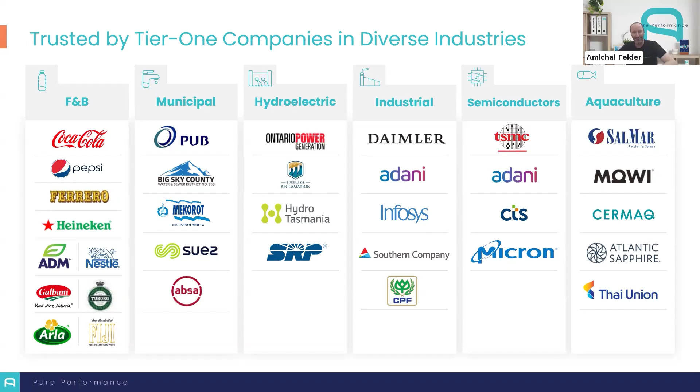Hello, so I'm Assaf, Atlantium senior scientist. Let's start with some definitions. So AIS is Aquatic Invasive Species, which means that it includes both freshwater and seawater organisms.

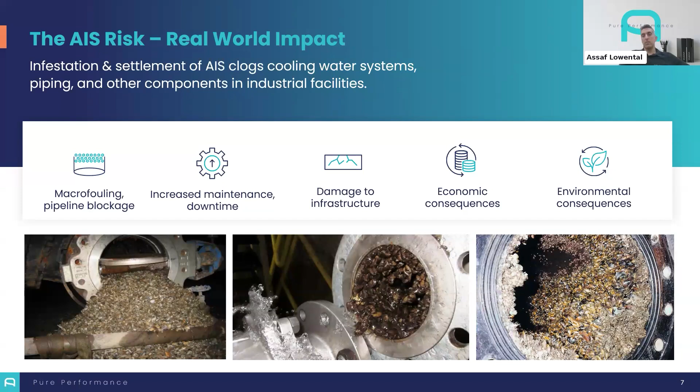Now during the last decade, this topic is already under regulation, and Atlantium is proud to be one of the solutions, perhaps the most sustainable one for treating ballast water. But this is not the topic of our webinar.

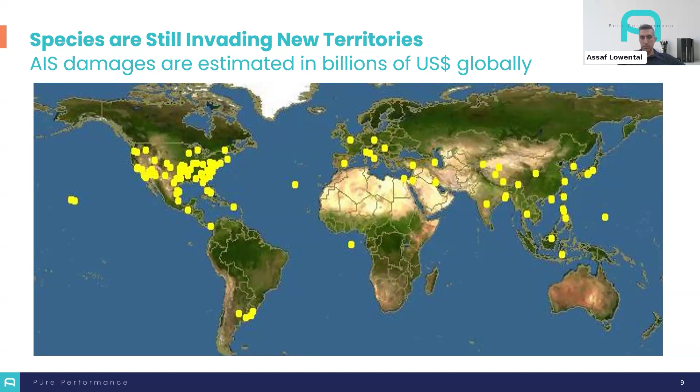So the bottom line, what I'm trying to say here, is that we have at least two cases where even after the ballast water management regulation is already effective, we still see new invasions. So it's only a growing problem.

For example, coral disease, which is what I was studying during my second degree. Also, they can cause operational problems such as biofilms. But again, this is not macrofouling, it's not clogging your equipment.

Next, slightly larger microbes such as diatoms and algae, they can clog your equipment, but this is not the topic of our webinar. UV can be used to treat those, but again, that's another story.

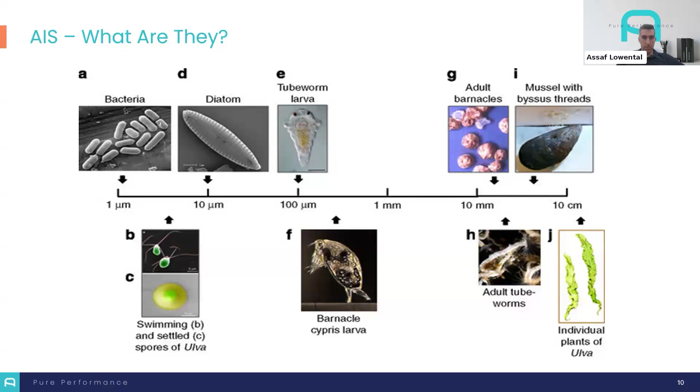So here I was talking about many invasive species which are not part of the macrofouling, but that's a list of many species that are macrofoulers. Some freshwater and some saltwater, seawater.

Now, what they all have in common is the critical feature that they all have a free-floating life stage. This free-floating life stage is also called planktonic, like plankton, or larval stage. Larva is like the baby. And so they can go through most of the filters and settle down on your equipment. Other than this planktonic life stage, another thing they have in common is that they usually require a very specific temperature for proliferation and high calcium for the shells.

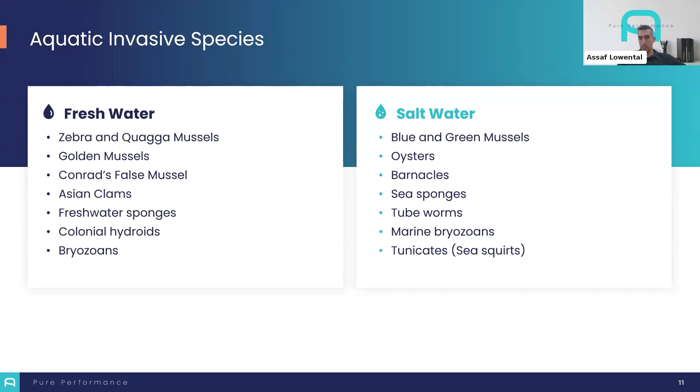Now, in freshwater organisms, the calcium that is needed for the shells could be a limiting parameter in some environments, but in seawater, there's plenty of calcium, but carbonate could be a limiting factor.

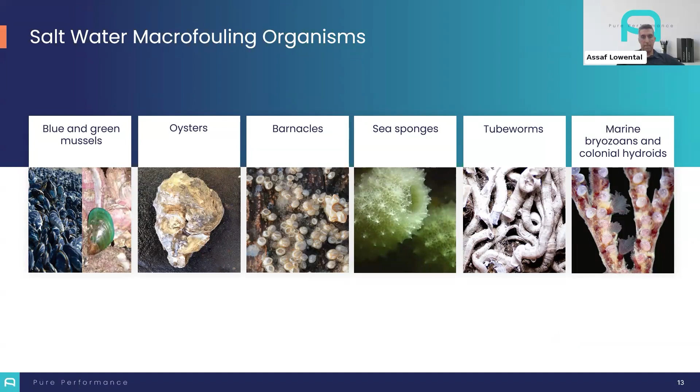All right, next. Now we're going to talk about the traditional treatment methods, starting with mechanical filters. Filtration would be the first guess for someone who just looked at the photos, right? They are pretty big organisms.

However, while filters will effectively block adult mussels, the larva, like the 100-micron ones, can easily penetrate standard filtration systems and subsequently settle on internal equipment surfaces, initiating new fouling. In some cases, another problem of filtration is that there are regulatory constraints limiting the ability to use large amounts of water for backwash and maintenance.

Going to chemical treatment, yes, indeed, it is effective against bacteria and many microorganisms. However, they do not provide comprehensive control for all aquatic invasive species.

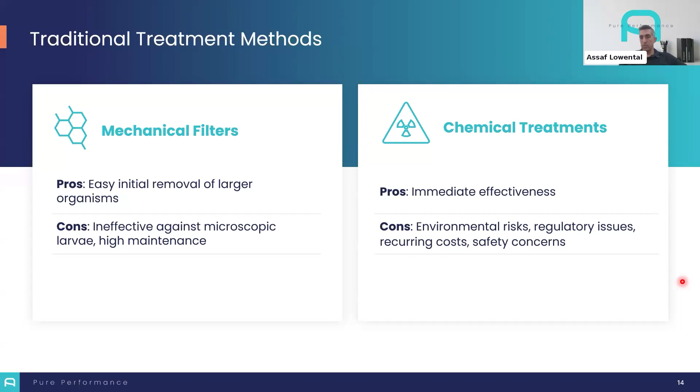Beyond operational factors like chemical handling, storage, potential corrosion, the primary concern with chemicals is their environmental discharge. Stringent permits often prohibit and severely restrict the releasing of biocides to the environment. Basically, this area of why we are not going to discharge biocides to the environment is called ecotoxicity, which is the risk of chemicals harming the local aquatic species and ecosystem.

The UV can treat only the planktonic phases. The cycle will, let's begin with the adult. The adult is releasing microscopic larvae. In this case of barnacles, it's called nauplii. It releases the nauplii into the water, initiating the planktonic phase.

The early larval stage is about 100 micron and can penetrate the filters, as we just discussed. After several molts, the larva can reach the size of about 500 microns with the sole purpose in life of attaching to the surface and metamorphosing into a juvenile, which is the sessile form already.

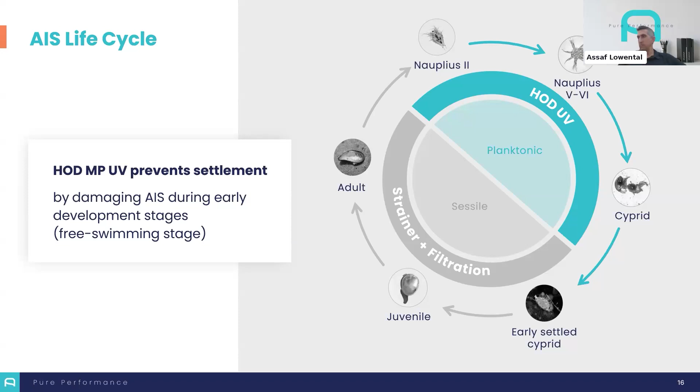Okay, now this is my last slide. In many cases, when we are asked to treat macrofouling, the problem the client is experiencing is with an animal we already have some experience with, especially if it's mussels. But in some cases, there are macrofoulers that we never treated before, that we don't have experience with. But we have the basic science saying that there are two rules of thumb to predict the likelihood of success. One is transparency of the larva, and the second is the life cycle complexity.

So I will explain. Transparency. If the organism's early life stages are transparent, our UV disinfection treatment is very likely to be successful, but not only is it going to be successful, it's probably going to require a pretty low UV dose for effective inactivation.

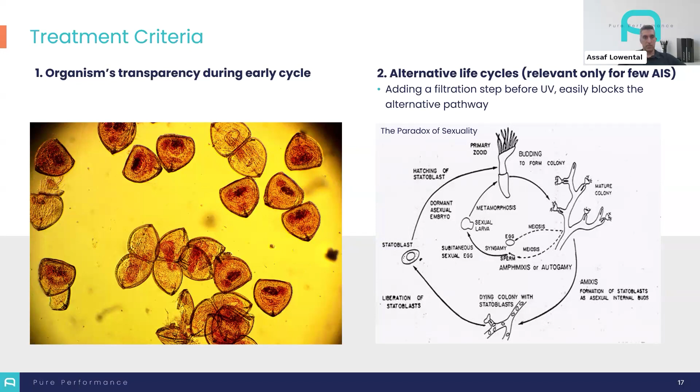Thank you, Assaf, for presenting the features of this important problem. Now I will briefly discuss Atlantium's solution, and we will see some examples of installations.

So first of all, when can we expect clients to approach us? There are a number of factors. Usually, it's after they have tried using chemicals, but it simply didn't work, and they're still suffering from AIS-related issues even after massive chemical injection. Sometimes, of course, chemicals can also cause secondary problems.

Needless to say, the chemicals that can kill the mussels will also damage other marine species. Another factor why clients approach us is environmental regulations, either self-imposed by the company or externally, and these regulations require the plant to stop dumping polluted water back into the environment. In both cases, the customer needs to find a chemical-free solution to its AIS problem.

Either way, Atlantium's approach, as Asaf mentioned before, is combining filtration, usually in the ranges of 300 to 600 microns, with the HOD UV. So in simple words, we say filter the large mussels and kill the larvae. The large mussels have little concern with regards to clogging of downstream equipment, as at this life stage the mussels lack the mobility and adherence capabilities. However, those large mussels can shade the larva while going through the UV, thus reducing the UV effectiveness.

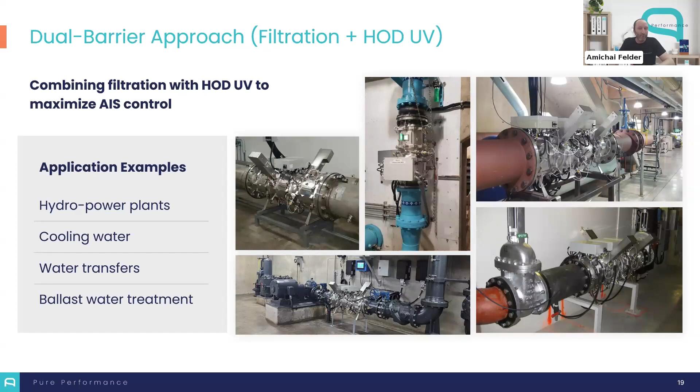And this is why we've adopted the dual barrier approach.

So most of the installations we have to date, I think more than 50%, are for hydropower plants, and usually the purpose is to protect the heat exchangers in the turbine bearings.

So this is a typical hydro plant, of course, and in this hydro plant there's a relatively small stream. I say small because it's all relative to the main flow in the penstock that is rotating the turbine. So usually you will find an 8 or 10 or 12-inch line that is going for cooling purposes of different equipment.

And the AIS-related issues that we see in these cases are either direct mussel settlements in condensers or heat exchangers that dramatically reduce the heat transfer coefficient, or we will see clogging of the filters that protect these heat exchangers, thus reducing the water flow.

And sometimes we're seeing both, meaning we will see settlements on the heat exchangers reducing the heat transfer coefficient, and at that point in time, when the plant requires more water for cooling, the clogging of the filters will not allow it, and instead of increasing the flow, you will have a decrease in the flow because of the clogging.

Let's look at some of our installations. First, I would like to describe the bio boxes. I'll take a step back here and describe these.

So when we're doing standard disinfection using our HOD UV, it's very easy to show the performance of the UV by taking microbial samples at the inlet and the outlet of the UV. And this is not the case when we want to show the performance of downstream equipment.

So sometimes in order to demonstrate the effect of the HOD UV, we're using a special box, actually two boxes, connected to the inlet and outlet of the UV, so that each box is getting a continuous flow of water and is continuously overflowing to the drain. So the BioBox is a simple way, I would say, to demonstrate and verify the performance of the HOD system.

Inside each box, there are plates made from different materials in order to mimic the downstream conditions in the strainer or in the heat exchangers. Sometimes it's metal and sometimes it's plastic.

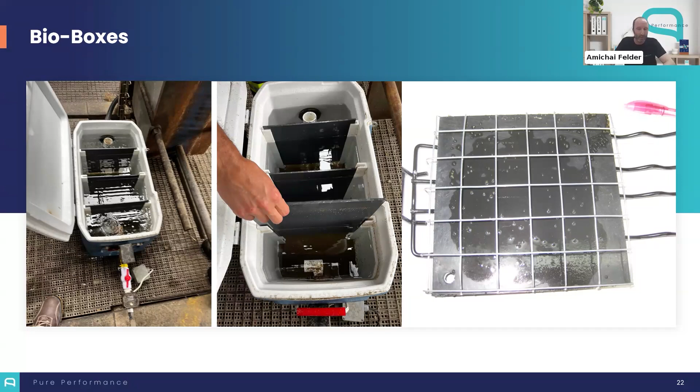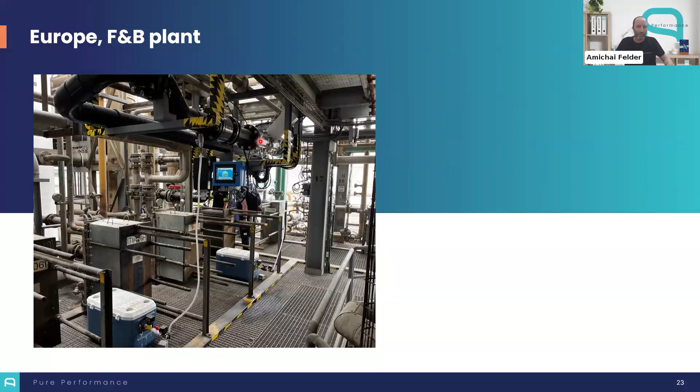So one example I can give of using these bio boxes is from Spain. This is a food producer, and here you can see the UV was installed on a 6-inch line. This was a full flow of 100 cubic meters per hour, and the bio boxes were installed at the inlet and outlet of the UV.

So the site was using seawater for cooling purposes, seawater from the Mediterranean Sea. And the client suffered from a massive load of Red Sea mussels that somehow migrated all the way from the Red Sea into the Mediterranean Sea.

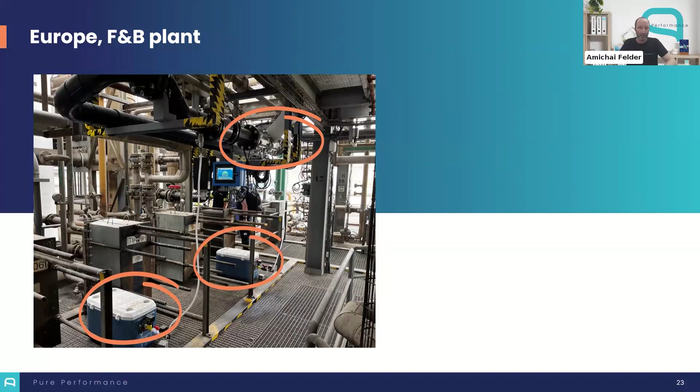So the massive detachment of the mussels can occur in one day during the summer, when the water temperature reaches a critical point. So what we will usually see is during the hot season, we will have the buildup of mussels in the piping, and approximately 27 to 28 degrees Celsius represents the upper thermal limit for many of these marine organisms. Then you will see detachment in one day, and basically this results in a plant shutdown.

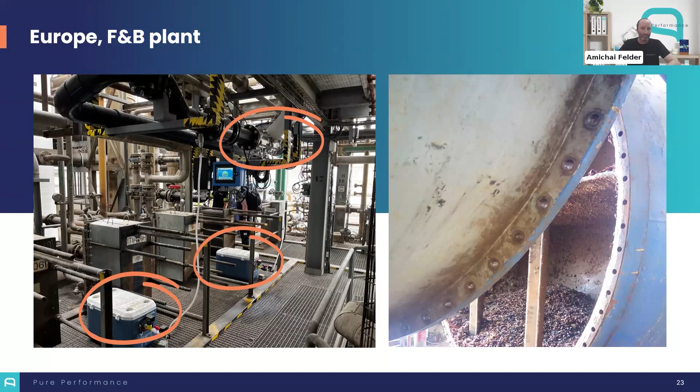What was interesting here, that even though in this site the goal was to deal with the Red Sea mussels, the findings on site show also the prevention of these white tube worms. I can't remember their names, but these worms have calcium shell, and they're even more problematic than the mussel because the settlements create a very dense film that is very hard to remove.

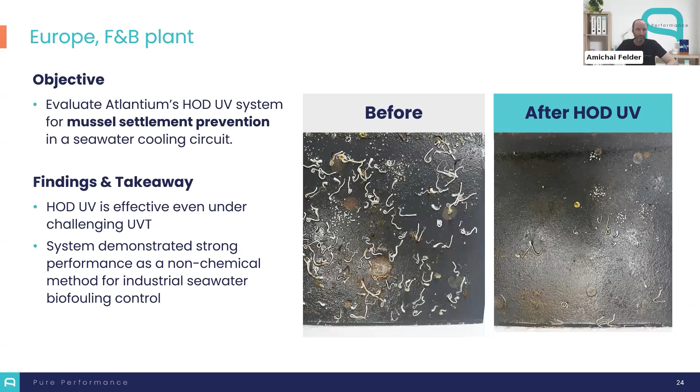Okay, one more demonstration site was in Brazil, this time for golden mussels. And this is in the hydropower plant owned by Copel, which is one of the largest electric companies in Brazil, in Paraná. So here the pilot was conducted in one of the auxiliary loops, cooling the turbine lubricant. The bearings have a lubricant and they are cooled by water, and this is in most cases what we see.

So one HOD system was installed here on a flow of 100 cubic meters per hour. So again, like the previous case, this was not a side stream test, rather a full scale installation. And right upstream to the UV, you see a micron filter. I think it was 150 micron here. So bio boxes were placed before and after the UV, and also other auxiliary loops.

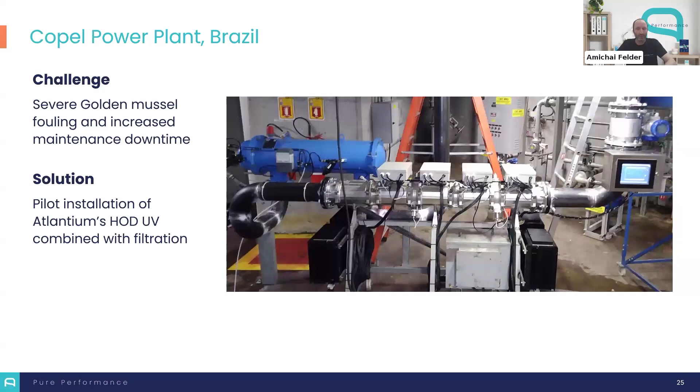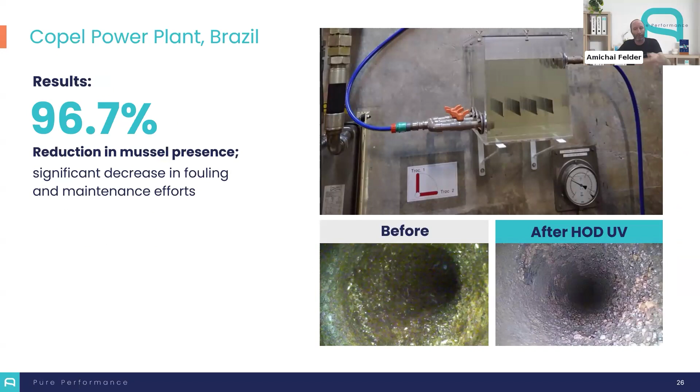So the test in Copel here lasted 1 year, and it was exposed to seasonal changes such as temperature and monsoons. Eventually, at the end of this pilot, the system was removed from the line. The pipes before and after UV were opened for examination, and the mussel settlements before the UV were much heavier than after the UV. Also, the results were quantified using the bioboxes plates in a report that is not shown here.

Okay, in this case, this is a pilot case in Europe. The client here was a water provider, and he wanted to adopt strict policy against the use of toxic chemicals or chemicals that can produce undesirable byproducts. And so they were looking for alternative solutions. They tested some technologies, among them is UV. And the focus here was to inactivate mussels at the intake point of the reservoir, as well as in the piping downstream to the reservoir.

So they were looking for three main things. One, safe for drinking water. Two, suitable for large scale. And three, can effectively prevent the settlements even after 24 hours in piping. So for this purpose, they set up a pilot consisting of three different types of UV, as shown in the photo here. So from top to bottom, this is competitors' low pressure UV, competitors' medium pressure UV. We didn't touch the difference between low pressure and medium pressure UV, but these are two types of UV technologies, and the HOD UV system.

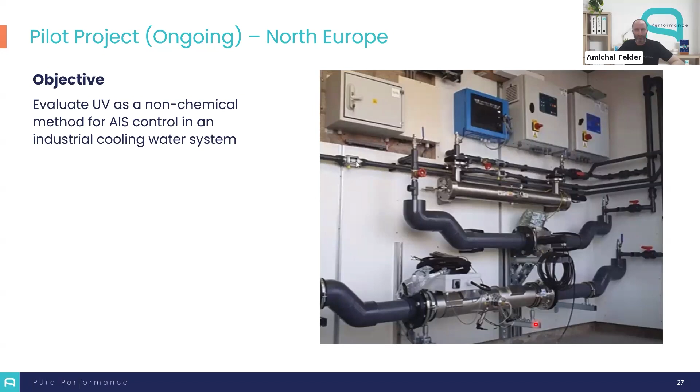Some of the results. So here you can see dry mass scraped from the boxes, and you can see it visually, while Atlantium had the lowest amount of dry mass from the bioboxes, and this is quantified. Again, it's ongoing, and we also have very nice results in terms of the DP buildup downstream to the UV system, because they were using a long pipe to see the buildup as representing the settlement.

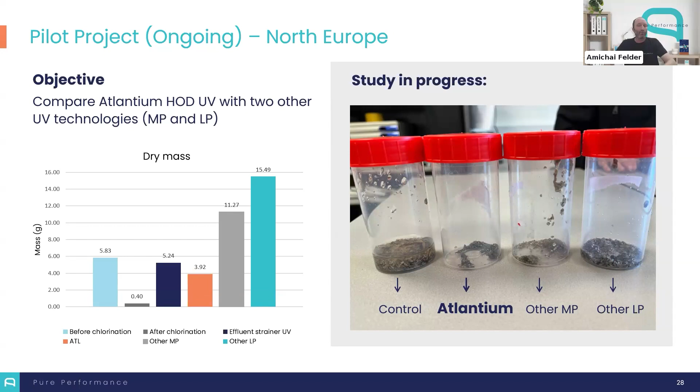So maybe the most famous hydro dam that we've installed the HOD UV in is the Hoover Dam, USA. So the client here was the US Bureau of Reclamation, and the client was looking for a solution to deal with the operational issue caused by the quagga mussels. So by now we discussed zebra, quagga, golden mussel, the Red Sea mussels, and some worms, the tube worms.

So the client in Hoover did a long study, and they tried chemicals as well as different UV systems. Finally, they chose Atlantium UV systems, and eventually we had, if I'm not mistaken, 11 systems installed below the ground here.

So following the successful installation, it was also published, by the way, in the Hydro Review magazine. And following this installation, Atlantium was officially declared as the technology of choice by the Bureau of Reclamation, and it followed further installation of more than 40 systems to protect cooling loops in the Hoover, Parker, and Glen Canyon dams. They are located in the lower Colorado River.

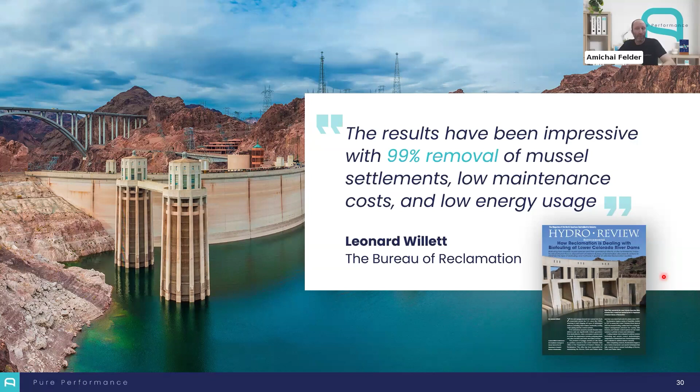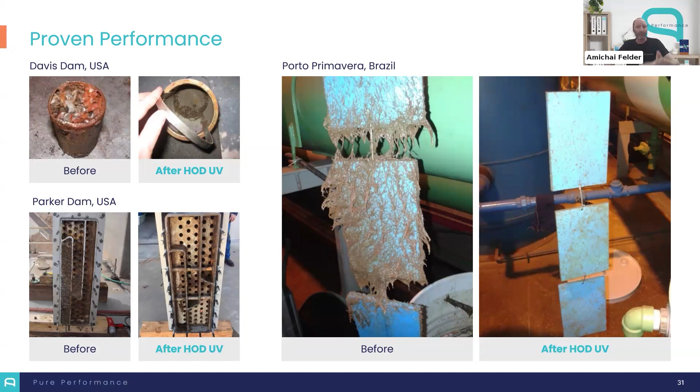And this is an example where the macrofouler here was Cordylophora caspia. I'm hoping I'm pronouncing it right. And despite the fact that it has more than one reproductive path, the HOD system was able to effectively protect against this macrofouler.

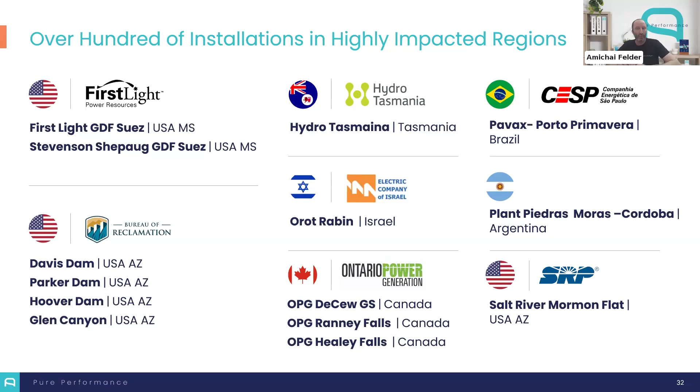Okay, finally, this is a partial list of the AIS installations to date. Most of them are in hydropower plants, since this was the focus of today's webinar. Of course, we have many more installations in huge water transfer projects in California and other places.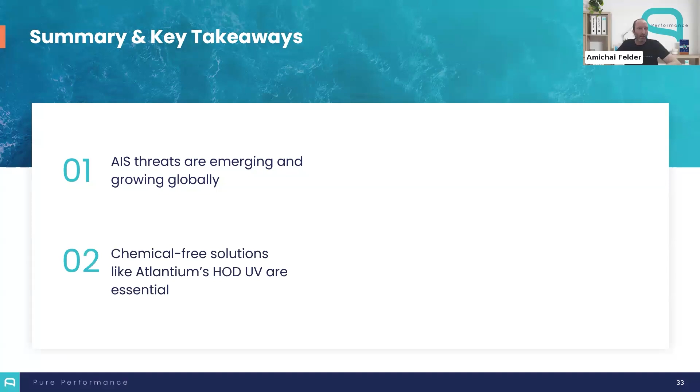So some key takeaways. AIS is an emerging concern globally. The HOD technology brings a new and proactive approach for AIS control. It showed superior performance over both chemical treatment and other UV types, and the technology is well proven for a variety of AIS and water types.

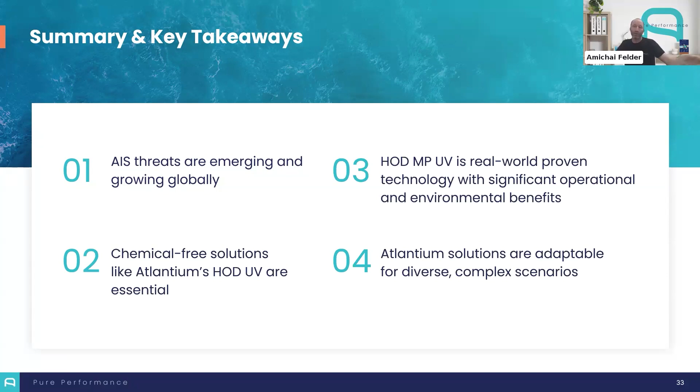I hope I didn't talk too much, and I think this is the time for some Q&As. Asaf? Yeah, I'll take a couple of them.

Well, there's one question about why the map of invasive species doesn't mention Brazil. That's a really good one. It's probably just because it's not a very good map. I guess the person who made the map was more academic, because Argentina is where the invasion started. But yeah, it's probably a bigger issue in Brazil, at least from Atlantium's experience. So that's a good point.

Another question I can take, because most of them are going to be for Ami, is can this technology treat all invasive species? Or let's say I'm going to fine-tune the question to: can it treat all macrofoulers? Then we don't know all of them.

For example, the life cycle I was showing before was of the barnacle, and this is an example of an animal we don't have experience with, but according to the two rules of thumb, the larva is transparent and there is no alternative life cycle, then we expect that it should be successful. But if we get an option to test it, we're going to do the biobox test, and then we're going to learn and of course share with everyone.